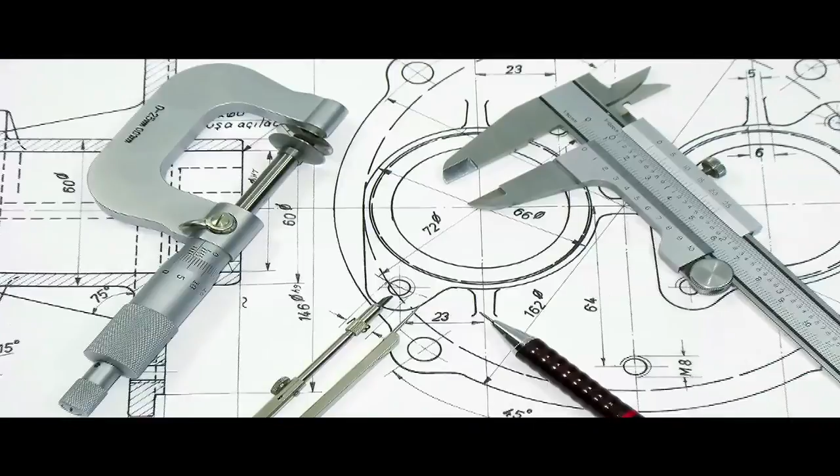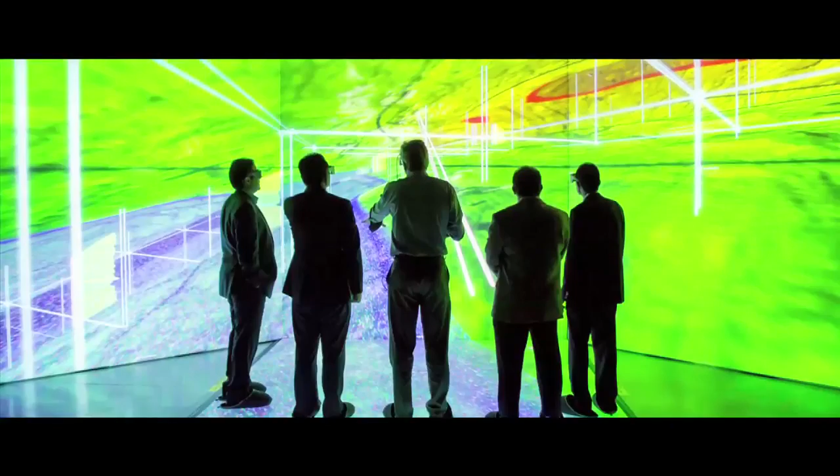In the year 2000, this institution conducted a detailed survey regarding the skill, attitude and aptitude of final semester mechanical engineers all over India. It is understood that a fresh mechanical engineer faces difficulties taking direct responsibilities in any organization because activities involved in various mechanical industries differ from each other. Engineers require additional specialization training to customize to the activities of the industry.

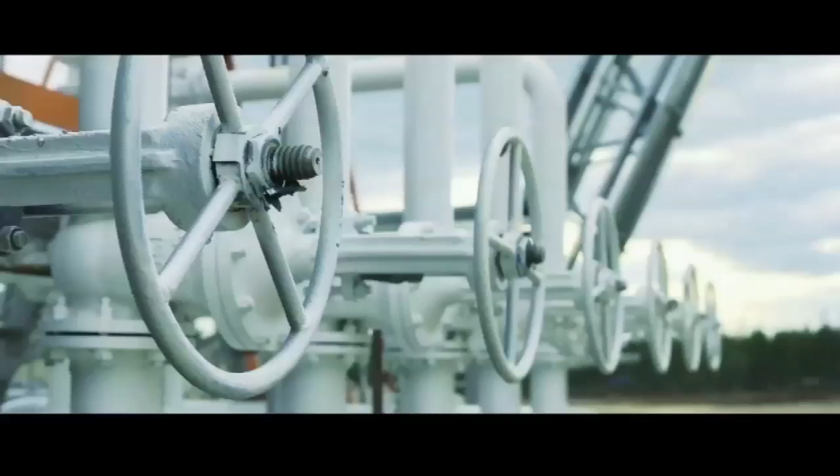Induscan Petroleum Institute made an in-depth analysis based on a survey conducted in different types of mechanical construction companies regarding job opportunities and skill requirements of mechanical engineers.

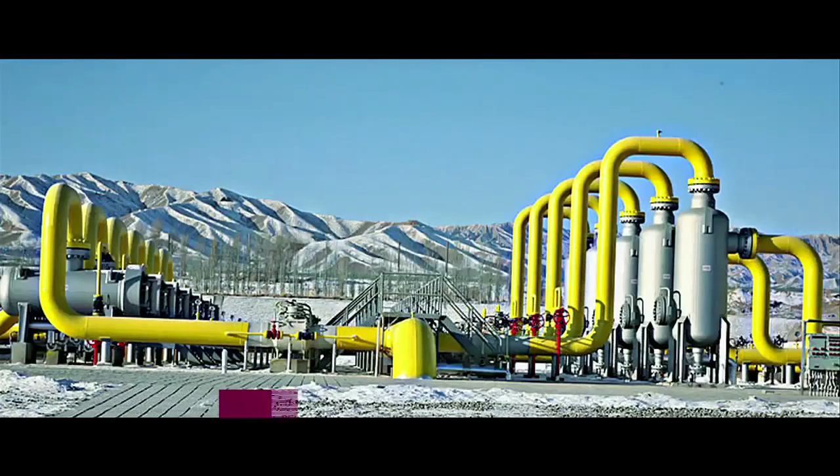Most of such industries, especially offshore oil and gas production platforms, onshore production facilities, oil refineries, thermal power plants, petrochemical plants, cross-country pipelines, pressure vessel construction companies, etc. are in search of a large number of skilled, dynamic mechanical engineers who can deliver the expected output to complete projects in specified time.

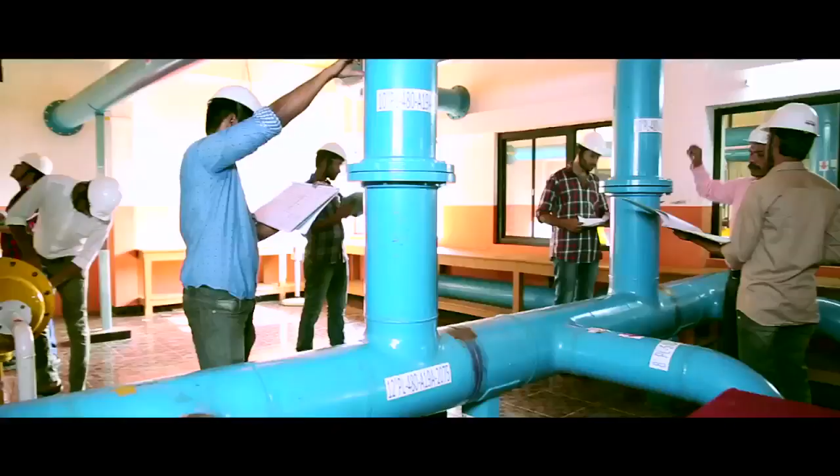In February 2002, Induscan Petroleum Institute designed and developed the syllabus, faculty and facilities for the short-term course of Oilfield Engineering and Quality Control, exclusively for mechanical engineers. Mechanical engineers all over India have undergone training from Induscan every year since 2002.

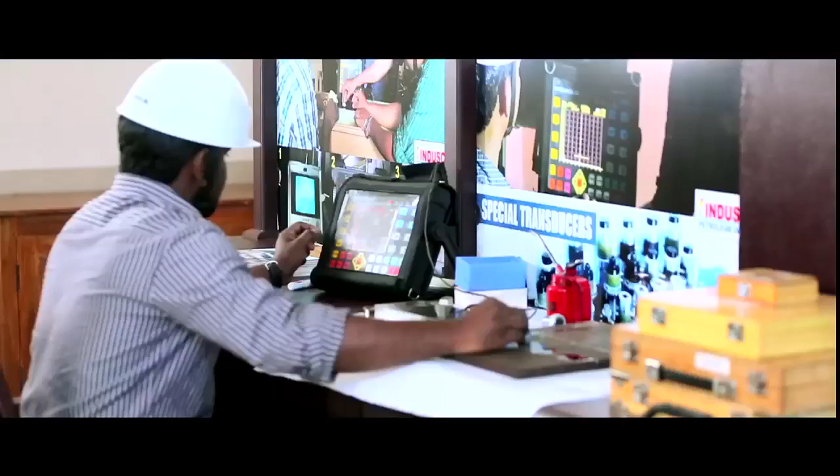By providing professional training, proper exposure and perfect placements, Induscan Petroleum Institute has constructed a strong bridge between mechanical engineers and mechanical construction industries. Thousands of mechanical engineers have successfully completed the course of Oilfield Engineering and Quality Control from Induscan Petroleum Institute since 2002, and they all got satisfactory jobs.

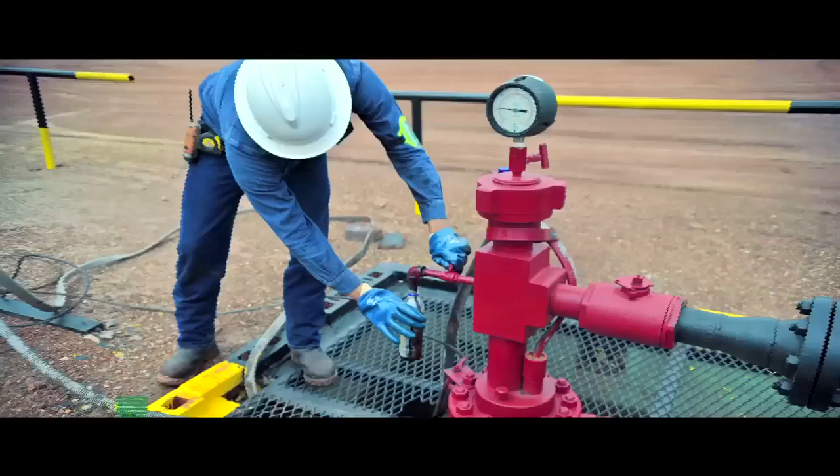They could take independent responsibilities without any previous experience. They realized that all mechanical engineering subjects are practically applicable. They experienced that the salary range shoots up in logarithmic progression. They found unlimited opportunities in the oil field and related industries all over the world. They could see at least one senior engineer from Induscan Petroleum Institute in their company.

Meanwhile, most of the LSTK EPC companies in India as well as abroad experienced the caliber of engineers from Induscan. They select fresh mechanical engineers from Induscan and engage them in direct responsibilities, just like engineers with a minimum of 3 years of relevant experience.

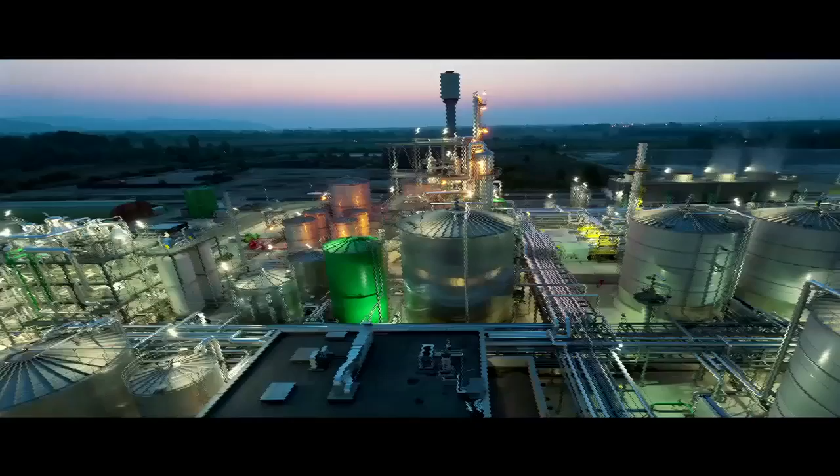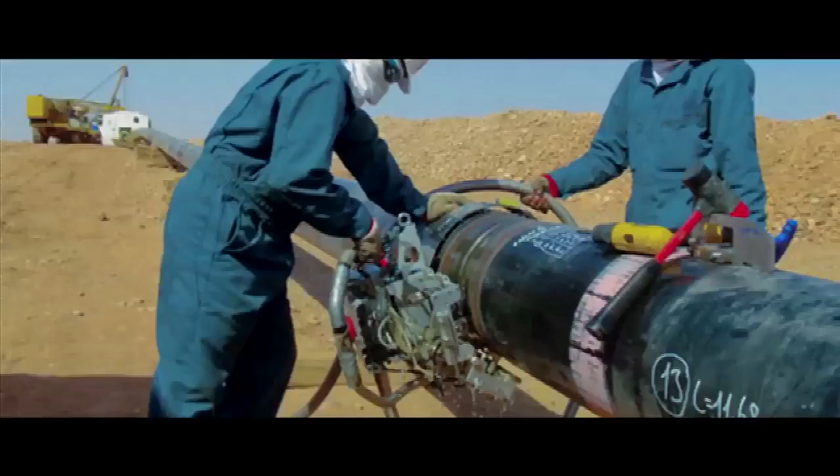The course: Mechanical Engineers with BE or BTech can join the course for Quality Control Engineer, OEQC, and Mechanical Engineering Diploma holders can join the course for Quality Control Inspector, OEQC. After successful completion of the course, candidates are capable of handling various responsibilities of oil field construction independently, just like an engineer with a minimum of 3 years of relevant experience.

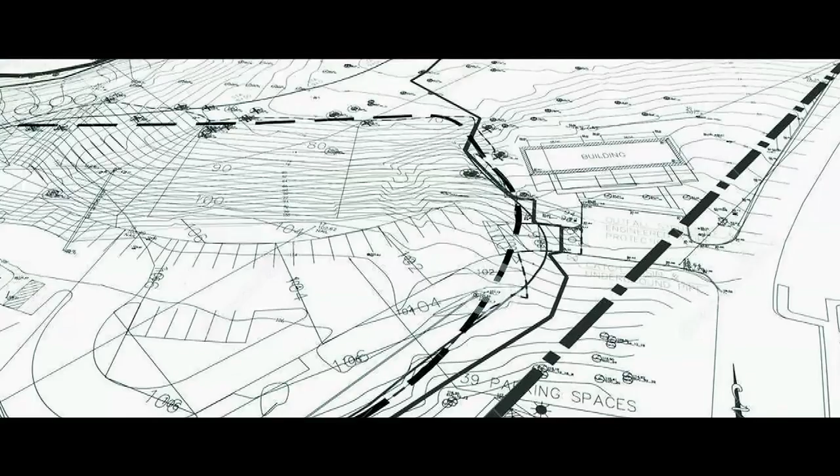The course syllabus and lab facilities are designed in such a way that engineers can take responsibilities in any position as listed below with best pay scale: Planning Engineer, Purchase Engineer, Materials Engineer, Piping Engineer, Fabrication Engineer, Welding Engineer, Inspection Engineer, QA/QC Engineer. Classroom and lab facilities:

Induscan Petroleum Institute is well equipped with advanced classroom, laboratory and workshop facilities. The theory classroom is a 350 square meter, fully air-conditioned theory classroom with perfect sitting arrangement, sound system and projector display screens for general subjects. Separate classrooms with all facilities are arranged for specific subjects.

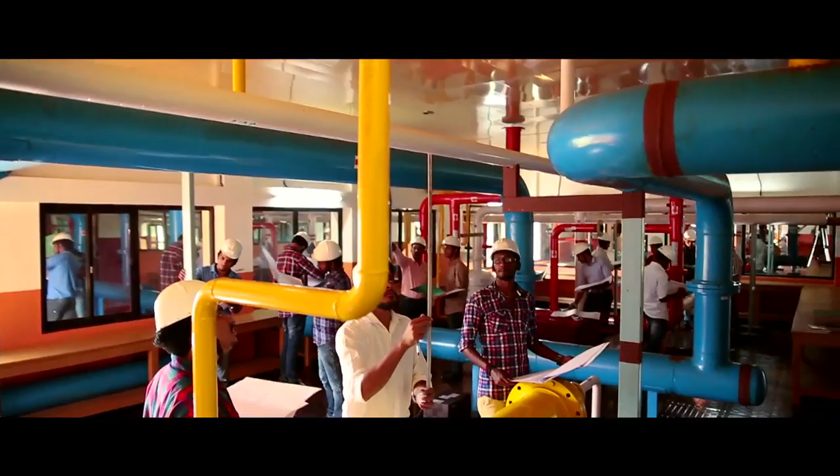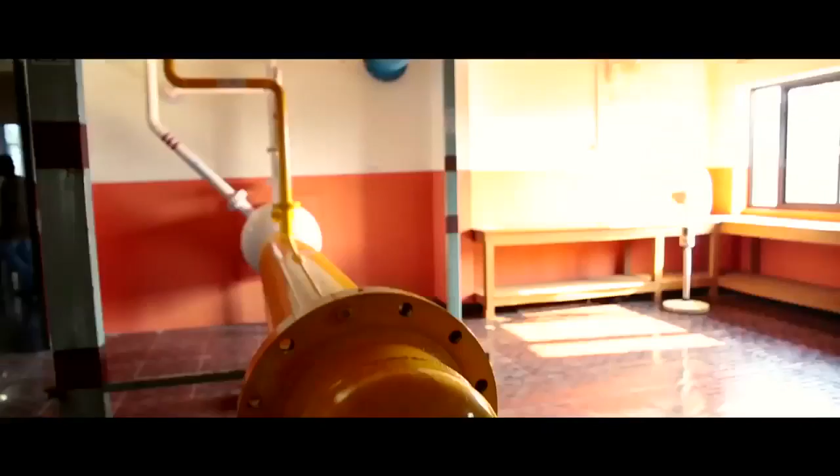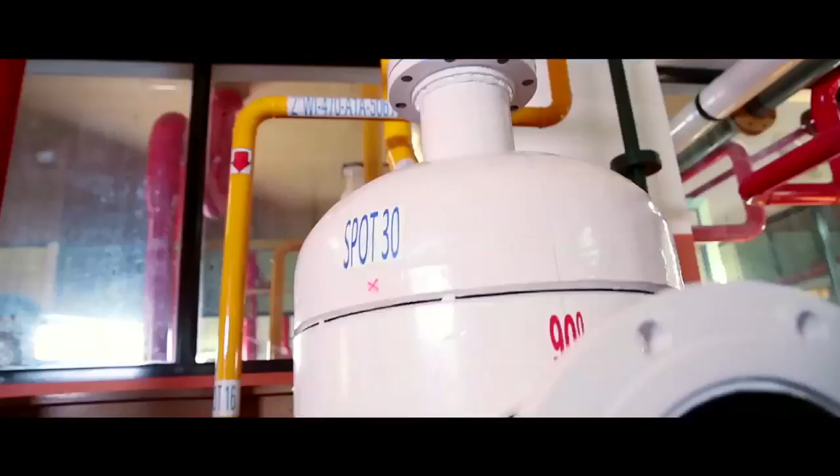Piping lab: The piping lab is constructed with the following specification. Total area is 110 square meters, with 750-inch meter of erected piping of heavy wall thickness carbon steel pipe ranging from half NS to 12 NS using butt and fillet welding. The piping lab is facilitated to explain P&ID and GAD, isometric pipe supports, coordinates, elevations, etc.

Three types of static equipment - heat exchanger, horizontal vessels and column - are installed in the piping lab to explain equipment drawing, equipment construction, nozzle orientation, etc.

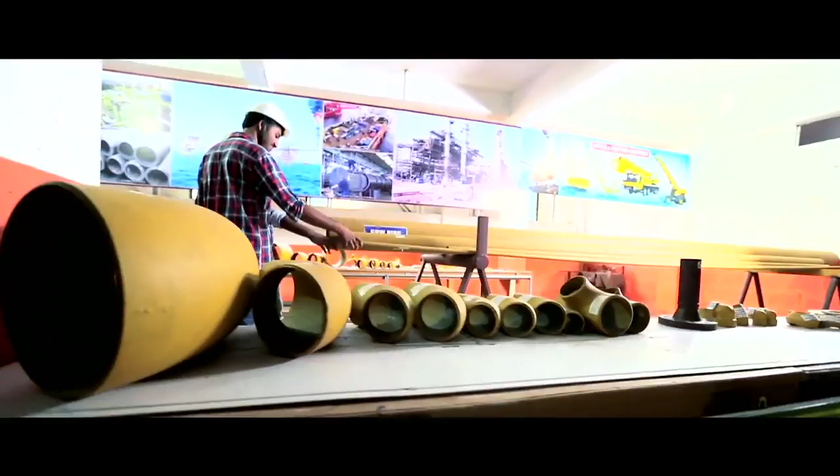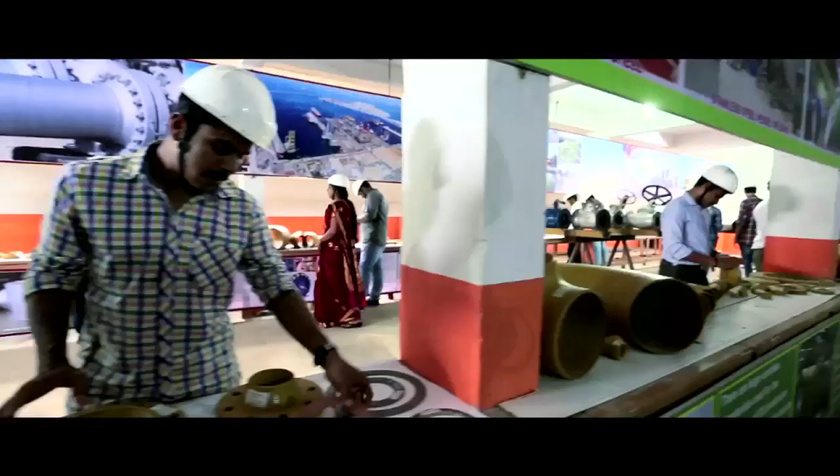Materials lab is arranged at 150 square meters in area, with sufficient quantity of almost all kinds of mechanical construction materials such as seamless pipes, ERW pipes, flanges, gaskets, fasteners, elbows, tees, reducers, Olets, weld caps, valves, etc., ranging from half NS to 12 NS in size.

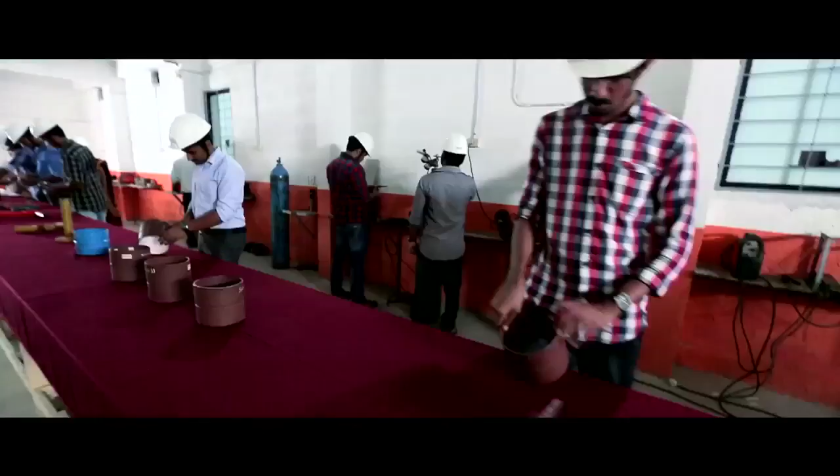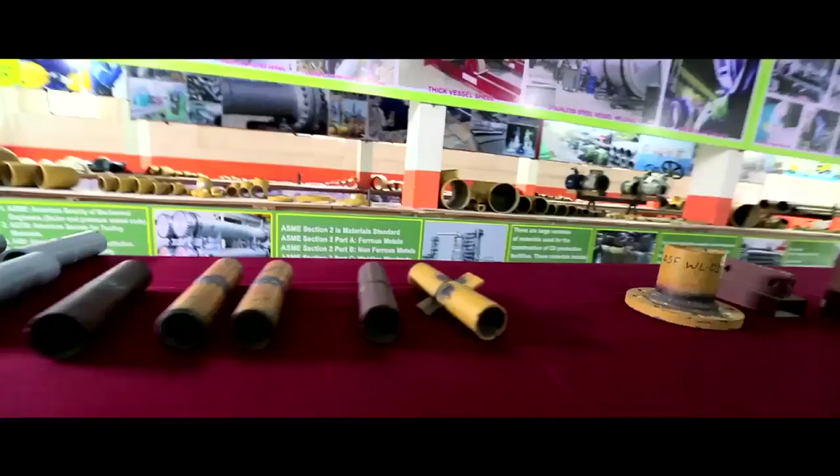Welding lab is arranged with the following specification. Lab area is 110 square meters, with facilities to explain different types of welding processes, welding procedure qualification (WPS/PQR), welder's qualification test, weld visual examination, welding positions, and weld defects.

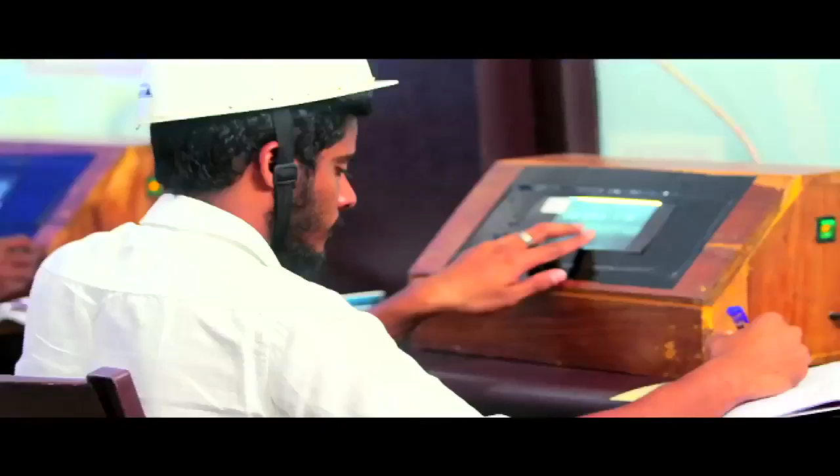Radiography test lab is facilitated to explain all types of radiographic techniques within an area of 75 square meters. Sufficient types of film samples of various radiographic techniques are arranged in this lab, with detailed explanation about standards and codes with the help of practical radiography available from this lab.

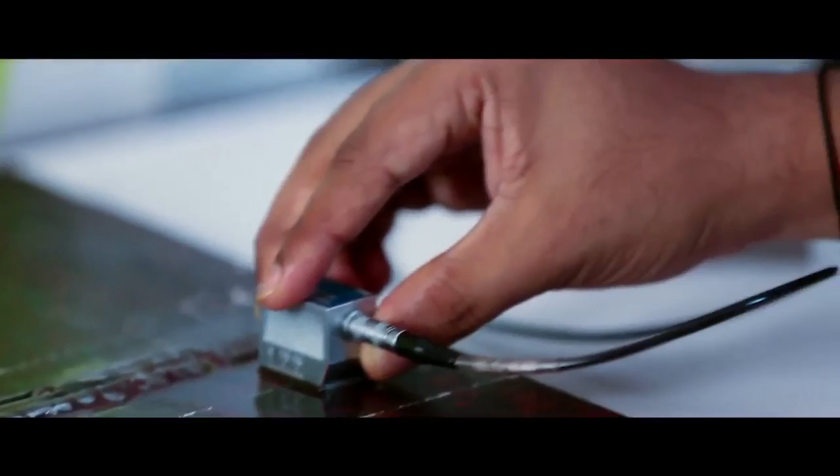Ultrasonic lab is arranged with facilities to explain test methods of different types of weld joints, machined items, castings, forgings, etc. Digital type UT machines, different types of calibration blocks, various types of transducers, etc. are arranged in the UT lab within an area of 75 square meters.

Penetrant test. Both the solvent removal visible method and solvent removal fluorescent method are used in the PT lab within an area of 75 square meters. Different types of test samples are explained with PT.

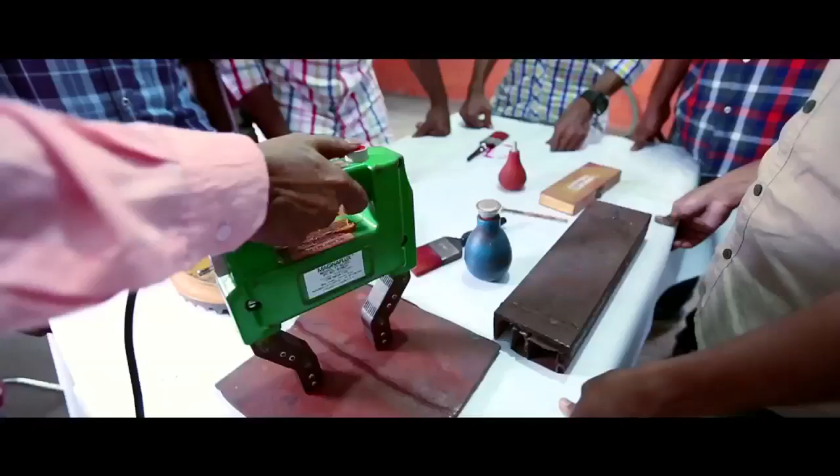Magnetic particle test lab, 75 square meters. Electromagnetic yoke method, permanent yoke method and prod method of magnetic particle testing are arranged in the MT lab.

Hostel and canteen facility. Fully furnished hygienic hostel facility is available within the institution campus. Reading room, library and TV room are attached with the hostel. A clean, neat and hygienic canteen is also arranged for tasty and timely food for hostel inmates as well as other students.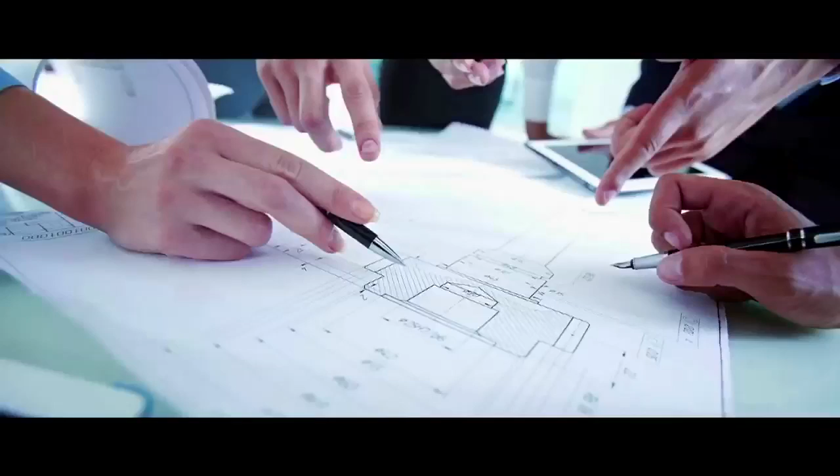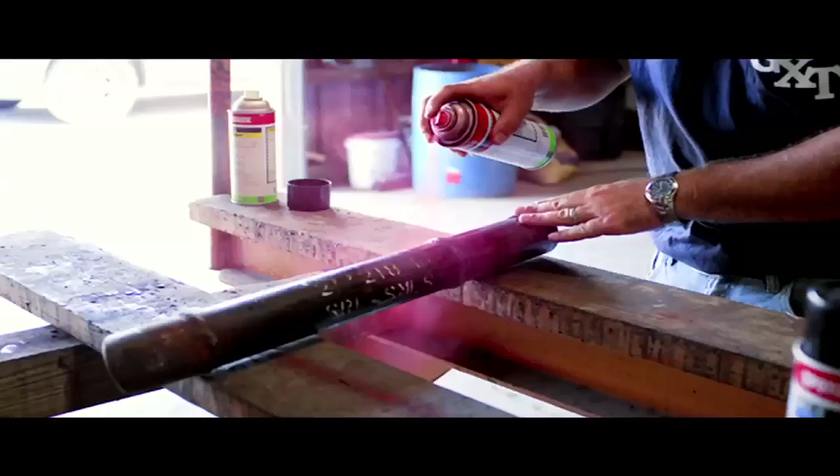Eligibility criteria for admission. A course completed certificate of BE or BTech in Mechanical Engineering is the basic qualification preferably required for admission to the course of Quality Control Engineer. BE or BTech in Production/Industrial Engineering is also eligible. A course completed certificate of Diploma in Mechanical Engineering is the basic qualification preferably required for admission to the course of Quality Control Inspector. Diploma in Production/Industrial Engineering is also eligible for admission.

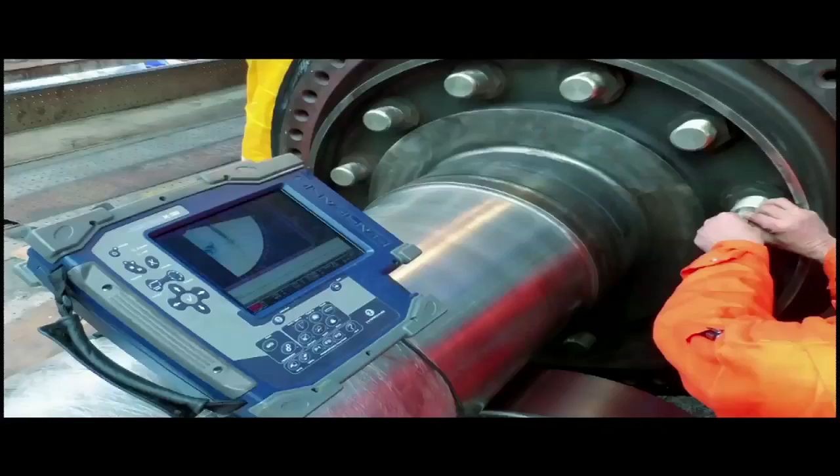Placement policy. It is not necessary to guarantee a job for engineers who have successfully completed the course of Oilfield Engineering and Quality Control from this institution. However, almost all of our previous batch students are well placed in India as well as abroad, and we have a batch-wise placement policy to help our students. The institution's placement policy for the batches of 2014 and 2015 is as below.

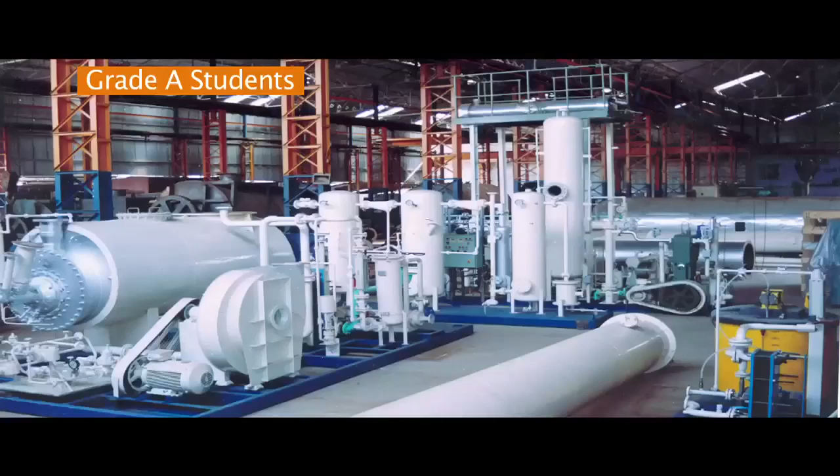For Grade A students who scored 90% and above, guaranteed placement in India. For Grade B plus students who scored 80% and above but less than 90%, placement support from Ahmedabad or Mumbai operating centers. For Grade B students who scored 70% and above but less than 80%, placement guidance.

Previous year statistics indicate an average of 25 to 40% candidates fall under Grade A criteria and 40 to 50% under Grade B. Applicants are requested to read the course conditions during admission, in which eligibility criteria for all grades are specified in detail.